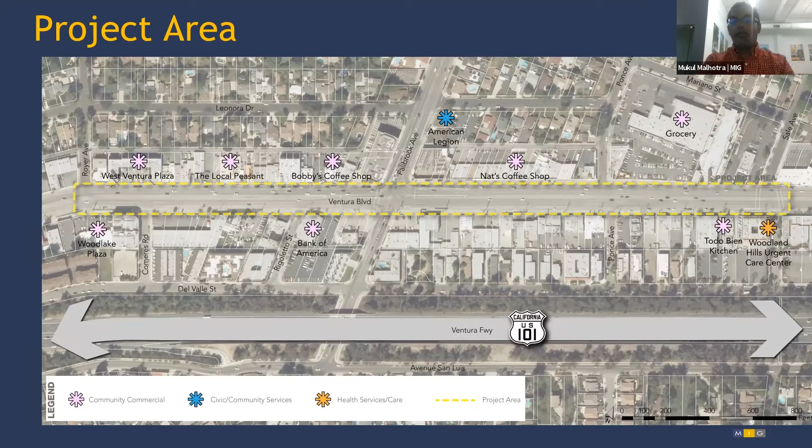Just to step back, it's important to remember that our project area essentially goes from Royer Avenue to Sale. The project goals are to improve overall comfort for all users of the street, people who walk, bike, roll, take transit, or drive. We want to create lively, active walking and bicycle environments, but it's critical that all improvements take into account the businesses, the local mom and pop shops valuable to creating and strengthening the Main Street experience, and then maximize improvements that achieve several co-benefits, like improving the overall tree canopy and other greenery that reduces the urban heat island effect, supports pollinators with improved planting, and improves water quality.

We clearly heard from the community there is a great deal to enhance the overall identity. Again and again, community members shared with us that they want to celebrate this part of Ventura Boulevard to become the Woodland Hills Main Street. This will help guide future grant applications in phase 2 improvements that Michelle talked about. At the end of the day, we want to make sure this is built on a strong foundation of feedback from you, stakeholders, as well as community members.

Lastly, emphasizing that this is phase 2 of the improvements, it definitely complements and builds upon phase 1 improvements, which focus more on signage and striping, improving parking, amenities, and of course improving overall safety for all users of the street. The project goals build upon the phase one improvements, which focus on creating diagonal parking, striping, and increased opportunities for people to cross the street.

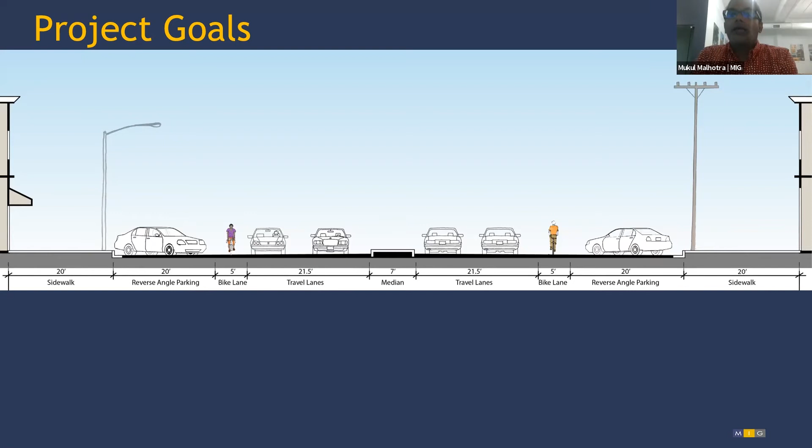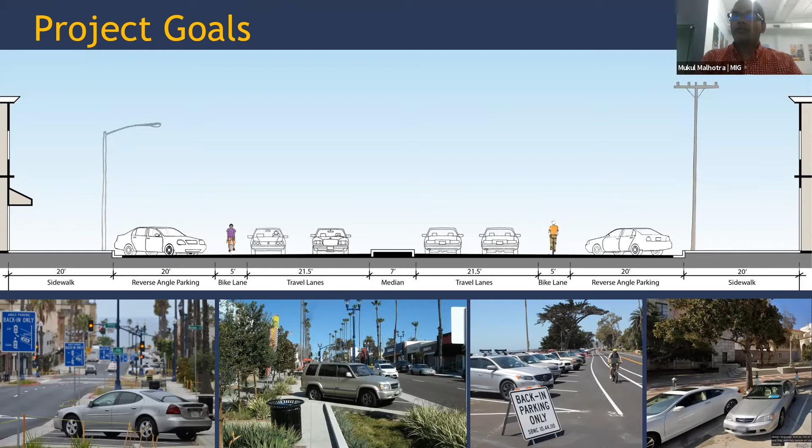This is building on what other cities have done over the last few years. You're seeing examples of Mission Avenue in Oceanside, or Santa Barbara, or closer to home in Pasadena on Garfield and Vista Avenues. This in turn builds on what other cities have done outside the Los Angeles County area, including Congress Avenue in Austin, or closer, San Diego, where Stephen actually lives along this street. So if we need to, we can ask him to share how he experiences a very similar street.

In terms of phase two, which is the primary focus of this meeting, we are really focusing on what's happening along the sidewalks, wherever we get opportunities with bulb-outs within the parking lanes, and of course the median wherever we get these opportunities.

We are definitely building on past and concurrent community efforts, including the 1997 Woodland Hills Streetscape Plan, the more recent Phase 1 engineering plans, and the citywide Vision Zero action plan.

Our project process was in 4 different phases. The first, about 2-3 years, we started with existing conditions analysis. A critical component was a number of stakeholder and focus group meetings that provided us valuable feedback. That was then married into the visioning and alternatives we did in spring of 2019. COVID-19 was a bit of a hiccup, but we continued to look at the different alternatives we'd discussed with the community, and laid out the emerging design layout.

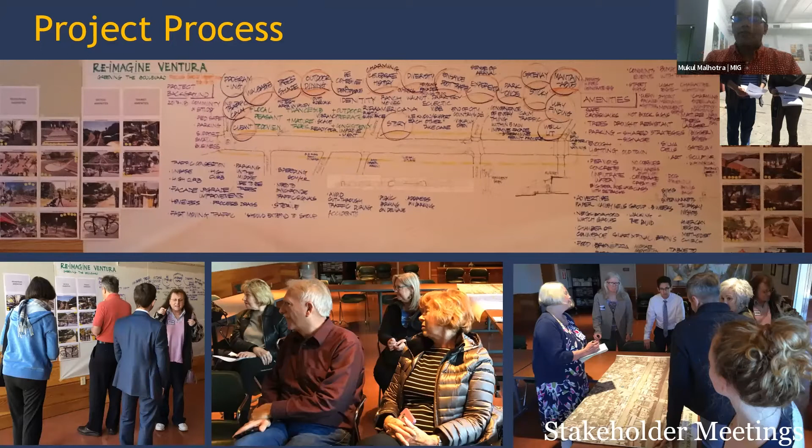I know some of you were there for the initial stakeholder meetings that we did. You can see we recorded all your comments, and that in turn helped us come up with the overall vision for this project.

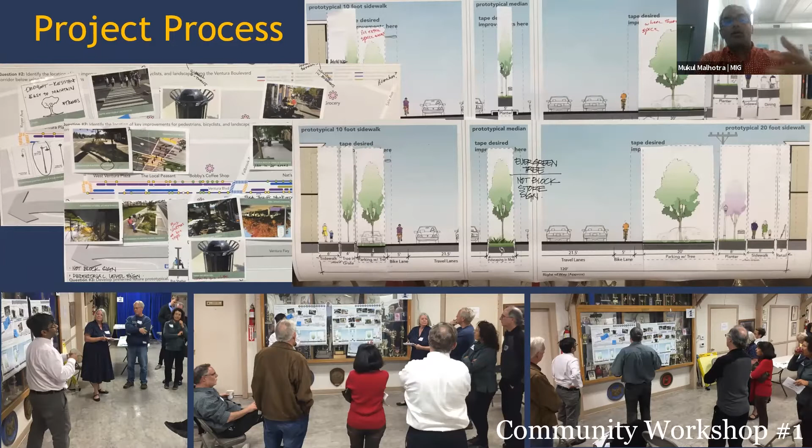At the first community workshop that happened a couple of years ago, we played with different alternatives. We heard how you wanted us to explore different concepts, whether it was a narrower sidewalk or a wider sidewalk along the four blocks between Royer and Ponce.

Building on that, it's important to keep in mind your vision: ensure safety, make it comfortable for all users, enhance walkability and bikeability, and build on economic development. The local businesses are critical to us, ensuring a Main Street experience.

Also celebrate the identity of being the main street of Woodland Hills, and sustainability, integrating it through trees and shade, reducing the concrete impact we have right now. And last but not least, any and all improvements should be maintainable.

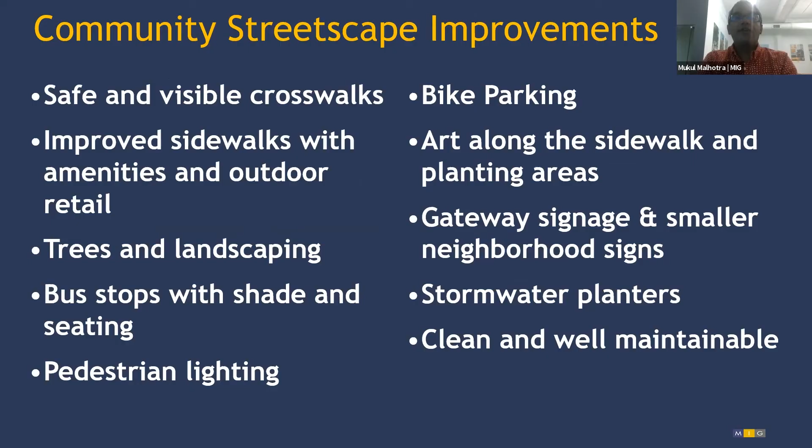With that, you also gave us the top 8, 9, 10 key physical improvements you would like to see all along the corridor. The first, of course, being safe and visible crosswalks.

We get increased opportunities both at Royer with a signalized intersection and high visibility crosswalks, and similarly we see new improved visible crosswalks at Ponce, which would have a pedestrian beacon HAWK signal.

You also told us safety means better pedestrian lighting all along the corridor, as well as making sure the sidewalks have amenities that increase the overall experience of the street, be it signage, trash cans, or some limited seating only at key points, primarily single seating elements.

This encourages more people to pause as they wait for outdoor retail opportunities or wait for people in adjoining businesses. Improved bus stops allow for more opportunities for people to take transit, amenities that encourage walkability, and complement the buffered bike lanes envisioned as part of the phase one project, including bicycle racks.

Having opportunities within the sidewalk would encourage more of our local businesses to use the widest sidewalks for outdoor retail, especially outdoor dining. We have a number of great cafes and restaurants, and we want them to have more opportunities to use the sidewalk and increase the overall Main Street experience.

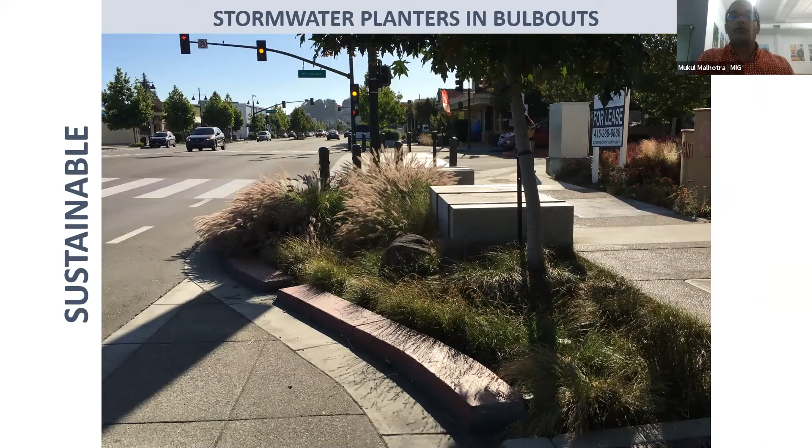Wherever possible, we want stormwater planters and more pervious surfaces to improve water quality. And last but not least, any and all streetscape amenities need to be selected so they are clean and can be well maintained by the city.

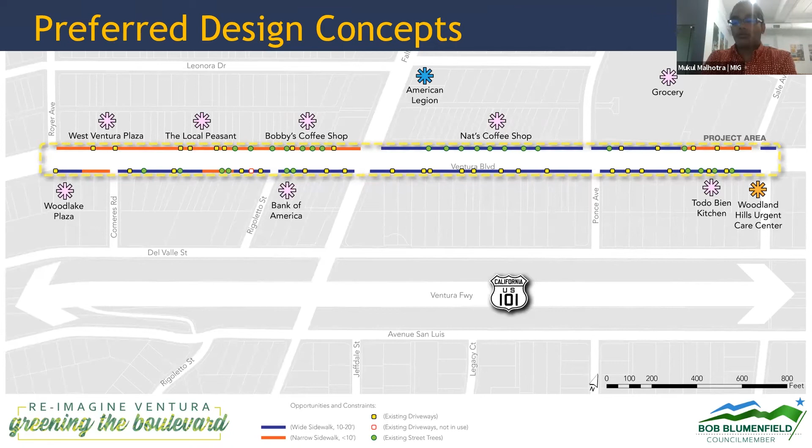With that in mind, we took all this great feedback on different types of physical improvements and began incorporating them along the corridor, keeping in mind two big prototypical experiences. The orange you see on this map is where our sidewalks are about 10 feet, sometimes down to 7 feet. Primarily along our corridor, what you see in blue are wider sidewalks, about 20 feet wide, allowing more opportunities for outdoor retail and dining.

Let's jump into the very first prototypical condition where the sidewalks are wider, about 20 feet wide. This is more an existing prototypical experience. We have some trees, not a lot, but we experience what is clearly a harsh, wide concrete sidewalk and harsh asphalt.

What we clearly heard from the community: let's improve the sidewalks, provide opportunities for dining, provide shade through trees, and incorporate amenities within the sidewalk. Provide a few opportunities here and there for single seating elements, complemented with sidewalk amenities such as bicycle racks, as well as identity improvements like signage or sculptural amenities.

Within the parking lane, continue that experience with drought tolerant, easily maintainable landscape planting, or with shade providing trees.

And what do we experience if we are driving in the middle of the corridor? Clearly, the desire is to make sure we can still see the experience being created along the sidewalk, and ensure traffic continues to move smoothly as proposed in the phase one improvements, but also allow for opportunities wherever possible. We have medians to allow for landscaping to create a sense of arrival, so people even just driving through understand this is a main street of the Woodland Hills neighborhood and it should be respected as such, increasing opportunities for local destination experiences.

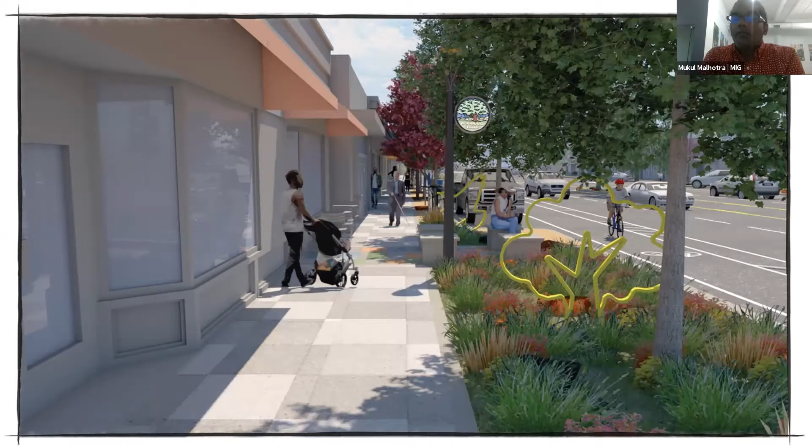With that, let's go to the other kind of experience we have, namely where the sidewalks are a little narrower, about 10 feet wide. Again, what is common in the 20 foot wide sidewalk experience is we have very wide impervious surfaces, be it concrete sidewalks not in good shape, or the roadway, which is a sea of asphalt. The desire is to have similar improvements to where we have wider sidewalks.

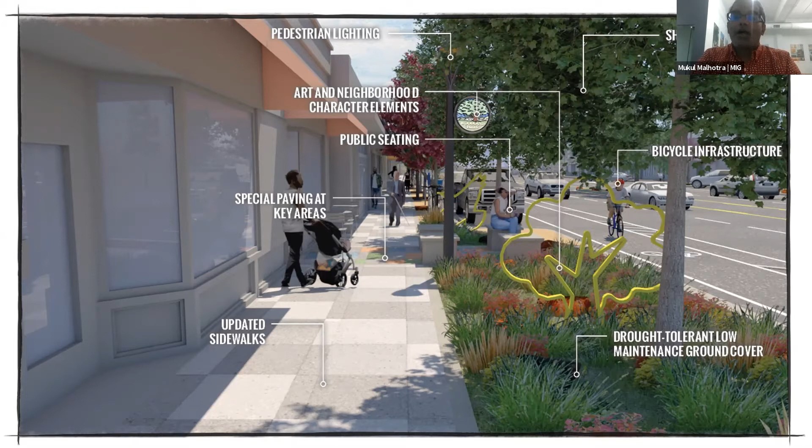Namely updating the concrete sidewalks, allowing for some color in the sidewalk or planting, providing amenities including seating, pedestrian lighting, shade providing trees, drought tolerant landscapes, but also allowing for opportunities for art and signage to celebrate the unique identity of this area.

And as we experience more opportunities to cross the street with high visibility crosswalks, we want to make sure they're complemented with similar landscape improvements and new signals, be it at Royer or a pedestrian hawk traffic control at Ponce.

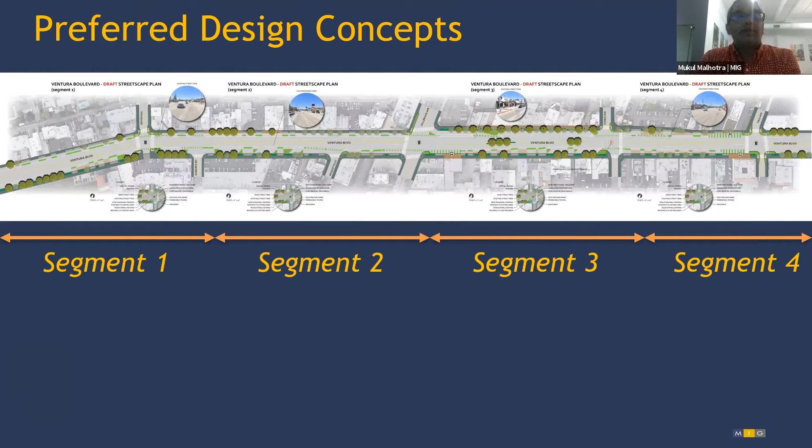Let's finally walk through from west to east and look at the opportunities block by block, starting from the very western edge between Royer and Comeres.

You experience this wide area on a day-to-day basis. The aim is to minimize the impervious surfaces, allow for shade providing trees, continue that experience of softening that area within the roadway, but also focus on emphasizing the opportunity we have at Royer with the signalized intersection and the much needed crosswalk improvements envisioned as part of phase one. All of these will have ADA compliant crosswalks or ramps to allow people of all ages and abilities to safely and comfortably cross the street.

As we go eastward from Comeres to Fallbrook, we continue the same palette of improvements, be it shade providing trees, diagonal parking, pedestrian lighting, improved crosswalks across Rigoletto or along Ventura Boulevard, and opportunities to improve with high visibility crosswalks at Fallbrook.

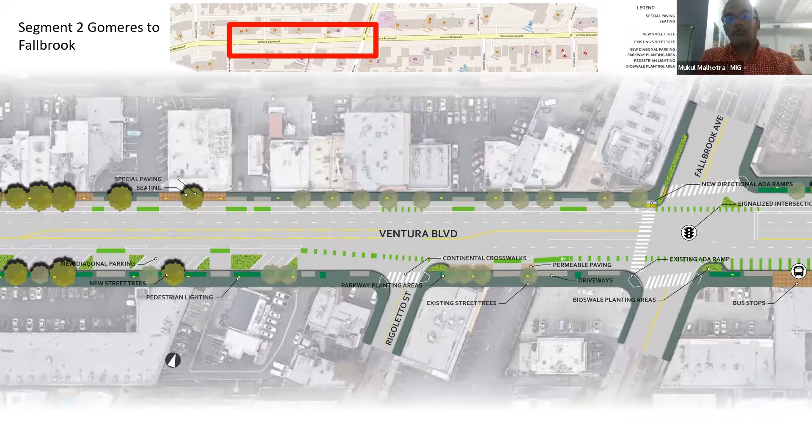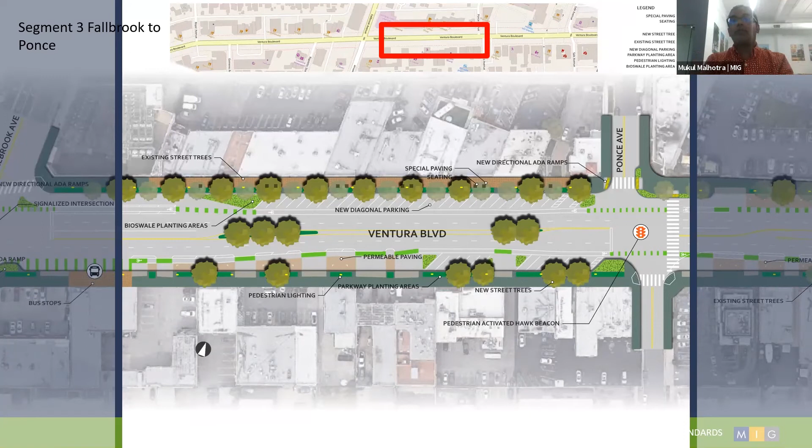The next block, between Fallbrook and Ponce, the opportunity is to continue the same palette of improvements, have special paving with reconstructed sidewalks, incorporate pedestrian lighting and shade providing trees, incorporate improved and new crosswalks at Ponce with the pedestrian activated hawk beacon signal, and allow for opportunities for signage as well as wayfinding to celebrate the overall main street experience, but also individual businesses.

And then the last block, as we go towards Sale, incorporates the same set of pedestrian improvements, including trees, pedestrian lighting, improved bus stops at Sale Avenue, as well as opportunities to celebrate the Main Street experience.

The aim is to incorporate a wide variety of tree types, making sure we allow for color as well as shade. We clearly heard this, and this is where we have carefully selected the planting palette to ensure that, be it new trees or trees as they become mature, there is very clear visibility to the individual businesses all along the corridor.

Complementing the trees would be the understory planting, which will be low water usage, easily maintainable, but also provide some color all along the corridor.

In summary, for phase one improvements that Michelle talked about, there's going to be a net gain of about 20 spaces. We are going to get a contiguous 1.2-mile long bicycle facility, and of course 7 new or improved crosswalks.

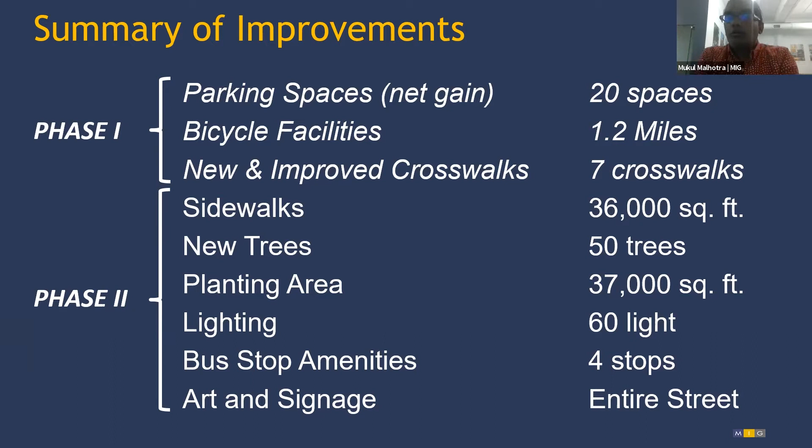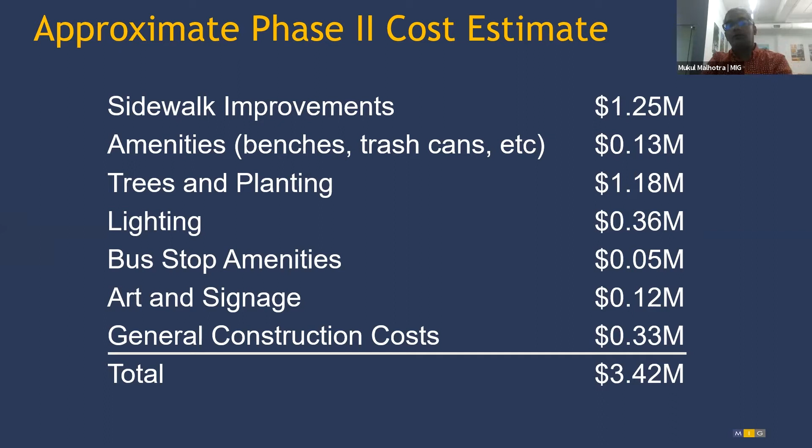What will it cost us? Essentially, overall, it costs about $3.4 million, with the primary focus being on sidewalk improvements, but also providing opportunities for trees and planting and pedestrian lighting, and last but not least, art and signage.

With that, we'd like to jump into our discussion. Holly, if you can help us add the 2 new questions we want to hear back from you: what you like about these proposed improvements, how would you like to refine them, and what are your preferred high priority improvements, be it improved sidewalks, amenities like seating areas, trash cans, pedestrian lighting, trees, planting, improved bus stops, art and signage.

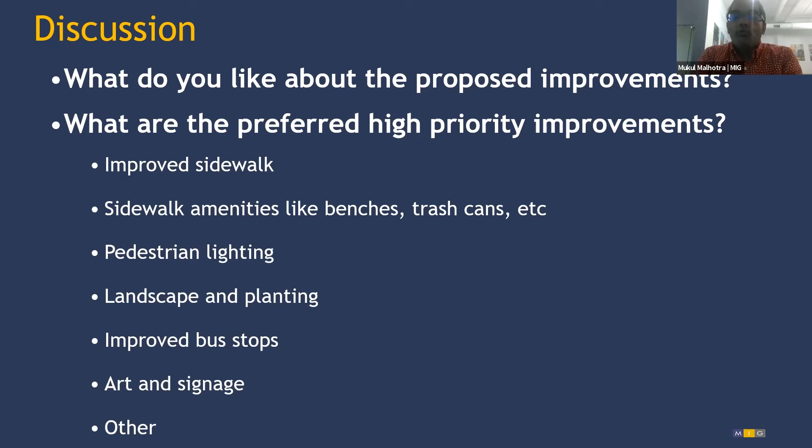We are going to record all of this, like we did a couple of days ago on Tuesday evening, with all your thoughts and feedback in what we are calling a mural board. Please provide us your feedback as I switch to our mural board and begin to record your comments. Stephen has already started to record these comments as he was looking at the feedback.

Holly, do you want to summarize some of the initial feedback we got while I was presenting? And then we're going to request people to raise their hands so we can have them share their feedback in real time.

Sure, Mukul, thank you. The one comment we got from the chat is really, what is the deal with the backwards parking spaces? I know this is an unfamiliar treatment, but it does increase safety. Maybe, Mukul, you want to take the first pass at explaining some of the benefits, even though that's not something people are used to?

Sorry, can you see the mural board now? I just want to confirm that you can. Yes. Okay, sorry, Holly, I apologize. Do you mind repeating the question?

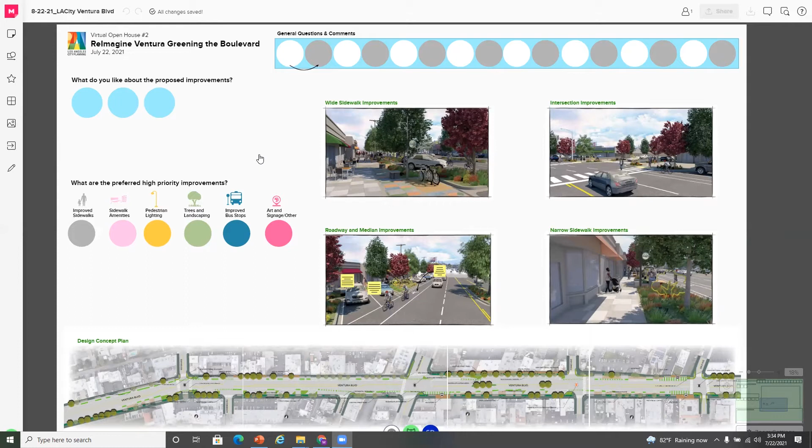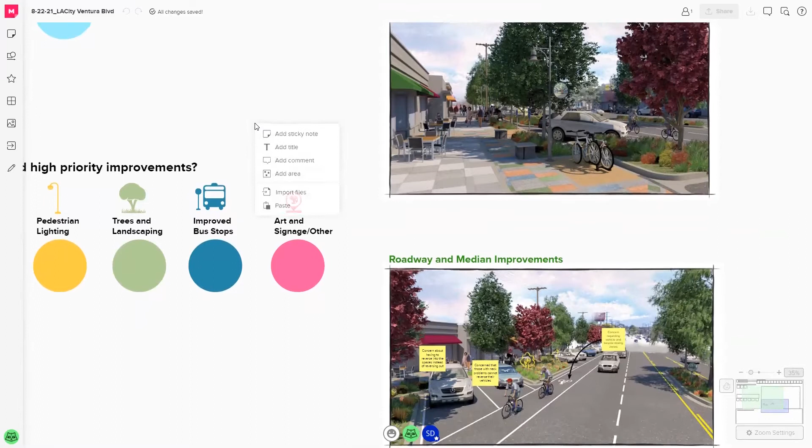No problem. Throughout this process, from the 2016, 2017 meetings about phase one onward, there have really been a number of questions and concerns about the back-in diagonal parking. I know this is a really unfamiliar strategy. It came from some of the community members who led off and were proponents of getting the council member to initiate this project back in 2016. We're really looking at ways to increase the number of parking spaces, but they do have a number of safety features.

Even though it's not the usual way, you want to take the first pass of explaining some of why we do this, how it integrates with the bikes, and how possibly people can navigate this.

So very briefly, the way the phase 1 improvements with the back-in parking was envisioned is what it clearly does: it improves safety in a number of different ways. Number one, it improves the visibility for both the person parking their car and when the parked car is trying to come out and move into the moving lane. It improves the visibility significantly.

Similarly, it also improves safety for bicyclists, and where this really helps is it allows both the driver and the bicyclist to have more opportunities to make eye contact. I know our cars now have sensors to help if we're close to an object, but nothing improves safety more than direct eye contact. This back-in or reverse angle parking increases opportunities to do so, so that is automatic safety for both bicyclists and drivers.

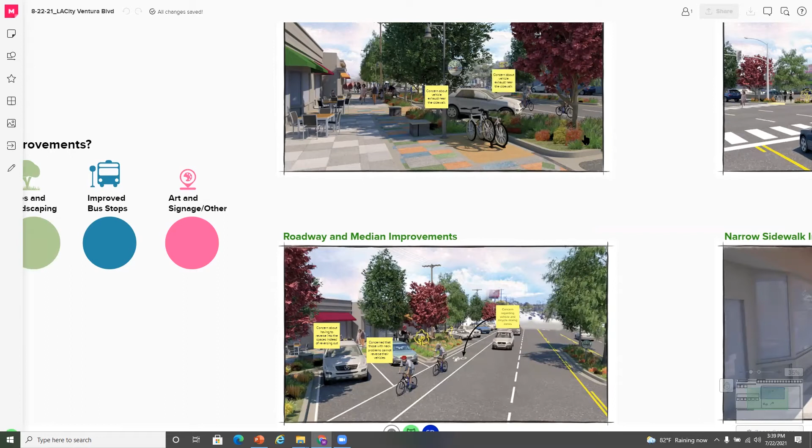There are concerns being expressed about the reduction in traffic lanes, what will happen to all the traffic, maintenance of the spaces, how they will clean them. Also concerns about the landscaping impacting visibility. I'll try to answer just a few of those.

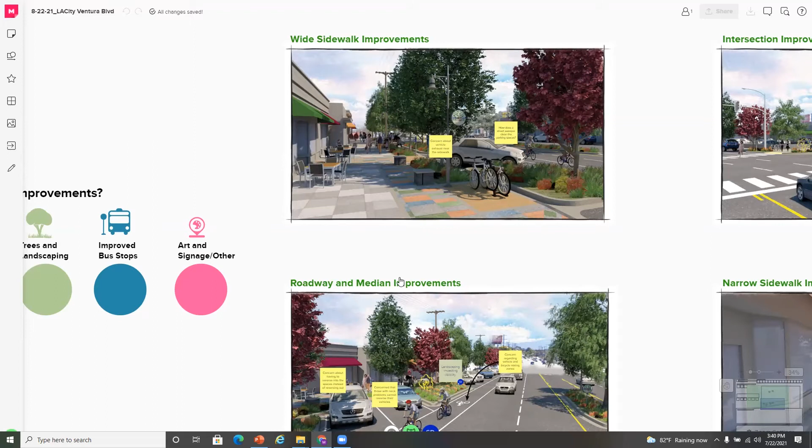There were significant traffic studies conducted as part of phase 1. This was a balance between taking this area, which now seems more like a freeway, more like an alternative to the 101 which it often serves as when the 101 backs up, and giving this more of a neighborhood feel without impacting the flow of traffic. Those traffic studies did indicate this would not significantly impact the flow of traffic.

But what it will do, I think everybody who drives the stretch knows, is that if it's posted for 35 miles an hour but it's not literally a peak period where traffic is backed up, people drive much, much faster, 50, 60 miles an hour. That doesn't help anybody, either for safety or for the businesses to have any sense that people even know they're there or what they might have on offer.

I don't want to go into too much traffic engineering 101, but there are a lot of counterintuitive things where we think driving faster makes the cars flow faster, but really 35 miles an hour is this kind of sweet spot where you can push the maximum number of cars through a given space, because you don't have as much racing up to an intersection just to stop, then queuing, then going.

We have definitely spent the last year coordinating with all of the departments. We had a question about street sweeping and maintenance. With LA Sanitation, we now have smaller equipment, it's not just one size fits all.

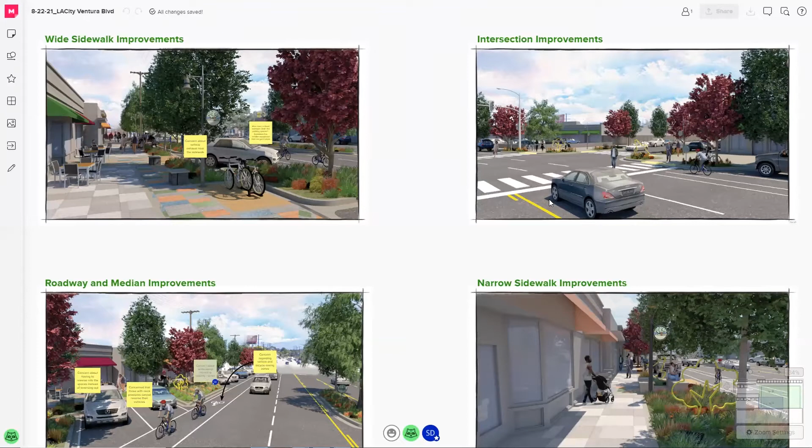All of the landscaping, this is something our Streets LA department, engineering, and DOT keep maintained. We still maintain all of the setbacks from driveways for new trees, and all the landscaping, even without any trimming or maintenance, is selected so it will never get above 24 to 36 inches high. And then we got some other questions about exhaust going into the sidewalk, not good.

But again, that's why, if I may just add, Holly, that planting strip, which is low maintenance and drought tolerant, would help with the buffer.

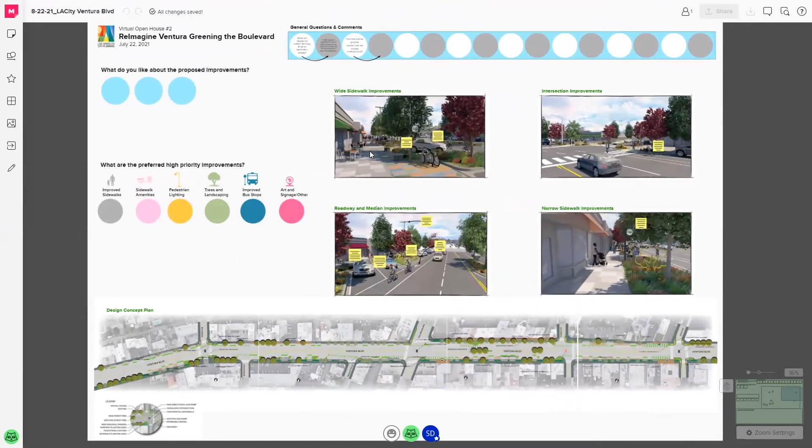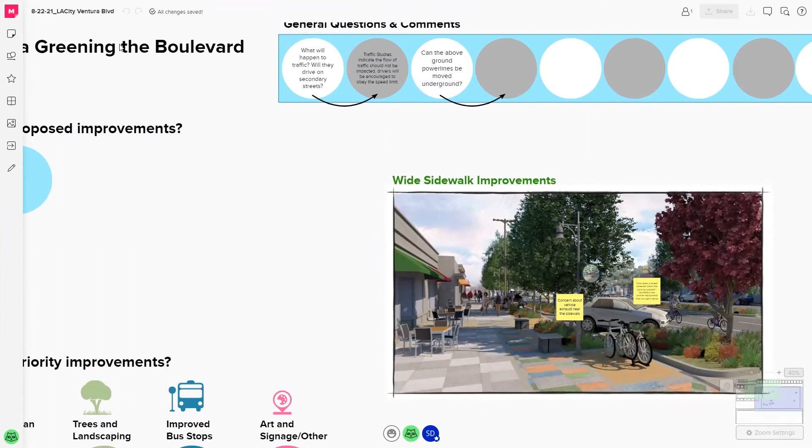So there's that, I don't know. It has come up, like I said, as a priority, but it's sort of a choice. Would you rather have undergrounding the power lines and then no other improvements other than what's being done in phase 1? Or would you rather have this?

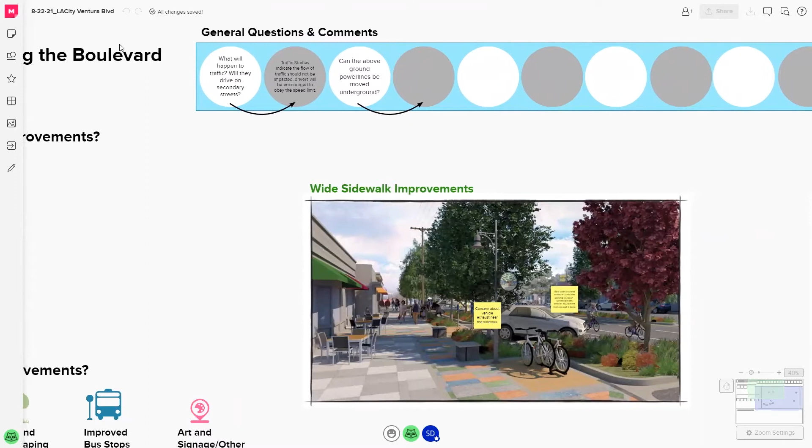It's kind of, there's not—while there is a variety of state funding programs such as urban greening, and county level such as Metro's active transit—there's a lot of funding sources out there for this type of greening and just livability and comfort. I think we've seen what's going on with the heat and the wildfires and everything else. We have to start preparing for the next 50 years. There's not any funding for undergrounding power lines other than what we pay in our bills. So that's the reality of where we are on power lines.

I hope that answers your question. I'm happy that you do like some of the other improvements.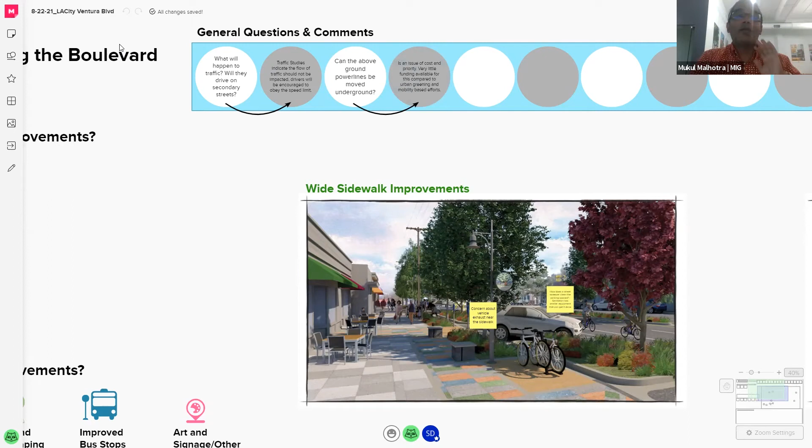So, okay, but I do see the presentation as well, and as I'm sure you all know, I'm a proponent of this project and everything that you're proposing, and I'm in support 150%. I just have a couple of issues that I've noticed on the plans, and I want to show them to you or present them to you.

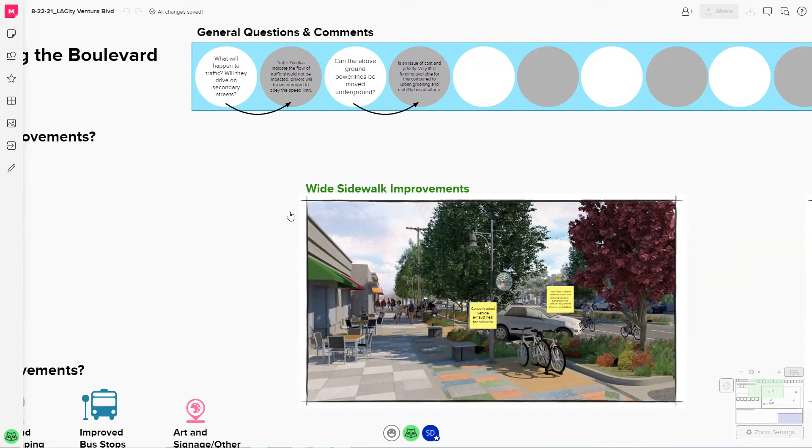One is that it looks like the planted medians are only occurring in a couple spots, and those are pretty important if you see your images, your renderings. Trying to increase the amount of planted medians would be very helpful.

I know there's an issue with the fire department, but if you can take a look just west of Rigoletto and 2 or 3 locations west of Sale, it looks like you could actually get some more medians in, and you should take another look at that if you can.

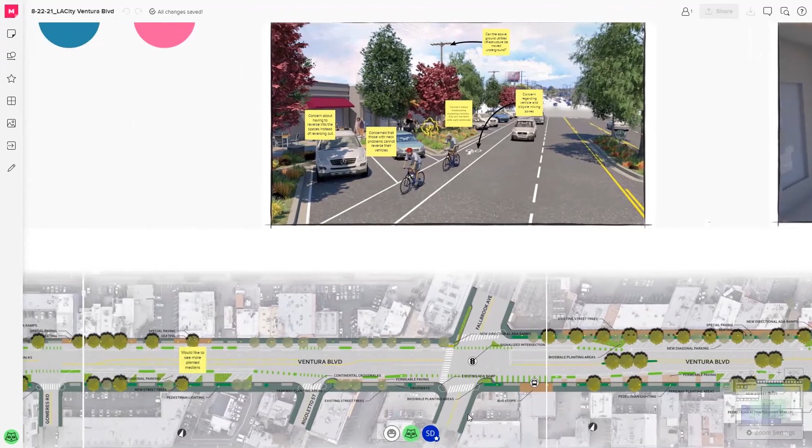Okay, and then the other thing is between Royer and Fallbrook, about 1,100 to 1,150 feet of length. It sure looks like it's going to need another crosswalk in the middle of that block, maybe at Gomer's or at Rigoletto. I'm concerned that you have diagonal parking opposite a business like the Local Peasant, and we haven't really solved that issue of people jaywalking and cars going fast.

So those are the two things I've seen, and I just wanted to fine tune things, but again, I want to stress how much I support the project and all the effort that's gone into it.

I appreciate it. Thank you, Dennis. Those are both good points about exploring more opportunities for medians in the middle wherever possible. Stephen is just putting those marks with the new crosswalk, if possible, and we will share that with the phase 1 designers too.

Reeyan, did you want to share your feedback? Yes, and I just want to say it's great to see a lot of familiar faces on the call, and I especially want to give a shout out to Dennis, Kathy, and then Jeff and Elizabeth from CD3, because these folks have spent a lot of time and dedication over the years working on this.

I have to echo what Dennis said. In a lot of ways, as far as activating the public right of way over there, and especially providing more mobility and uses, a crosswalk of some type, whether with a dedicated signal, signage, or a pedestrian refuge area, would definitely improve the mobility in that area.

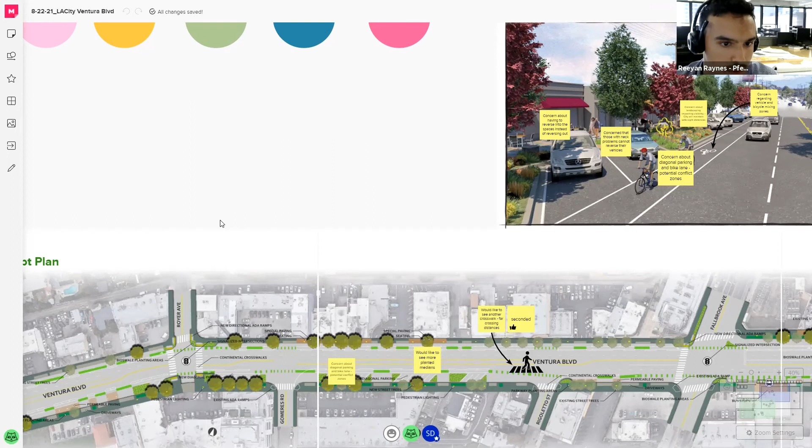And then secondly, if you go back to your renderings a little further up in the presentation, I have to compliment how well these came out. I think this one here, the wide sidewalk improvement, is a good example of the types of usage you can see. But more importantly, as we know, different uses of non-fixed furniture in the public right of way typically become a problem with retail security.

So if there are more ways to include civil infrastructural improvements with street furniture, I see you have some benches, but I'd push the design team to look at something a little more friendly or character defining in the area. Some of the ground treatments are quite incredible, and some of the public art installations and bulb-outs are really creative for this neighborhood. Look at some of those funky, unique infrastructural objects that can give this more of a placemaking, character-defining feel that we'll see in other parts of the city.

But with that, I'll save my time. I just want to say thank you to everybody, thank the design team. These are quite incredible, and I'm super eager and excited, like a lot of us, to see this happen. So thank you guys.

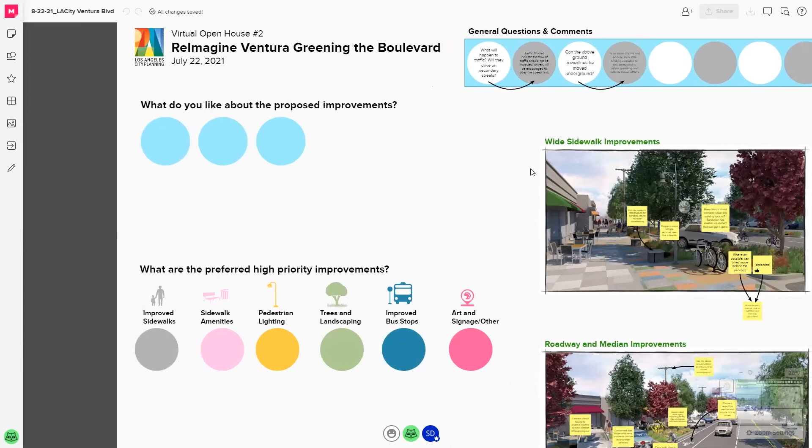There's many reasons for that. Once people have parked their vehicle or they're on the sidewalk, they've kind of checked out of being part of traffic. Very frequently we'll just step off the sidewalk into the lane or step out of a car, or someone with a walker, especially someone - it's a big issue with the vision impaired folks, because you're channelized, right? There's literally no room to avoid a collision. I don't go very fast, but I've had some close calls, and some people move pretty quick on their bikes.

I know that Jeff answered that - with the number of driveways, intersections without signals, so much of the parking would have to be taken out to make that possible, even from a visibility standpoint.

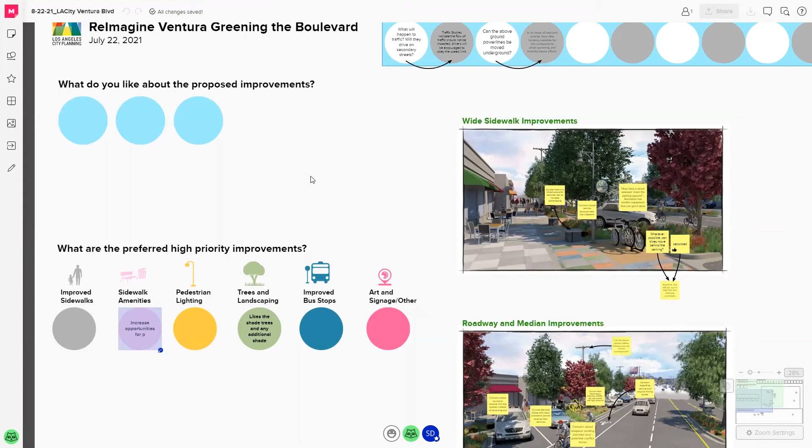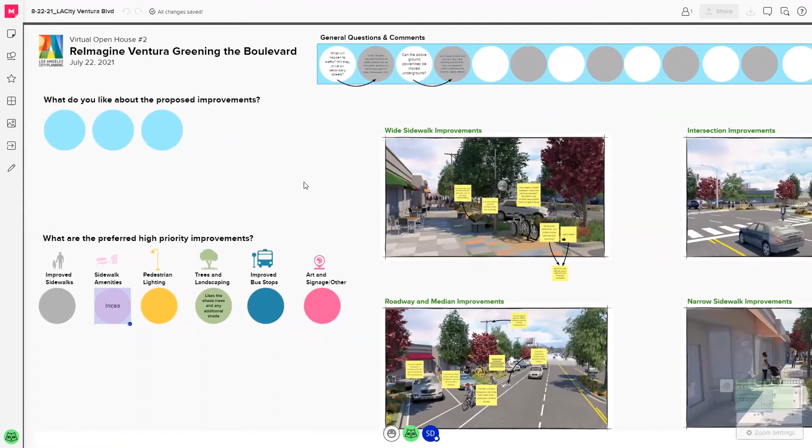I was going to say one other thing here. Oh, I know what it was, and thanks, Reeyan. The mid-block crossing, I mean, great, right? We all love those. It comes up again and again that people park across the street and then dash across to places like the Local Peasant spot, and then sometimes when they're coming back, they're maybe a little tipsy or impaired. So it really is a dangerous situation.

But it goes back to the same thing about the sheer number of driveways on the south side of this stretch - they're such a challenge, right? They're a challenge for the median, they're a challenge for any kind of mid-block crossing, because you still have to have turning space and visibility coming from both directions in and out of those driveways. It's not like we've ignored it.

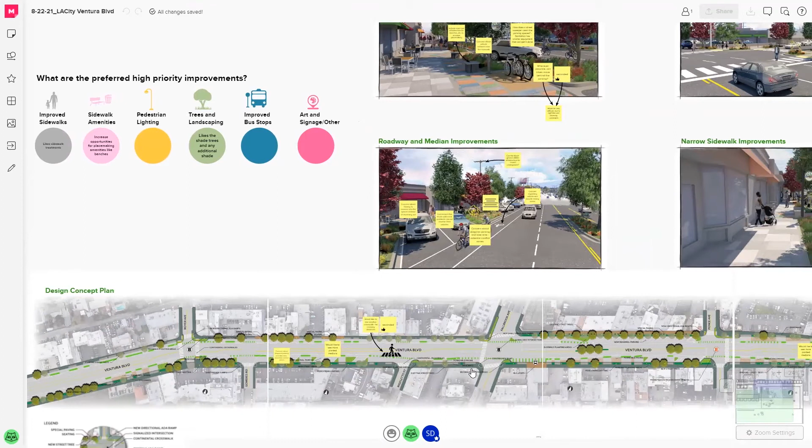And honestly, we haven't quite - we're still fighting the good fight about seeing where we could add more median space. But right now we're responding to what is being striped and proposed as part of phase one, and so these are in essence the pieces of the median that have been left to us. We've tried to get planting in them wherever possible. I hope that answers your question.

Areas for people to return e-scooters to. Wow, e-scooters are another one of these things that came out of sort of out of space to our city just a few years ago, and that still has not been, I would say, adequately resolved. Some cities like Santa Monica paint areas where people should return them.

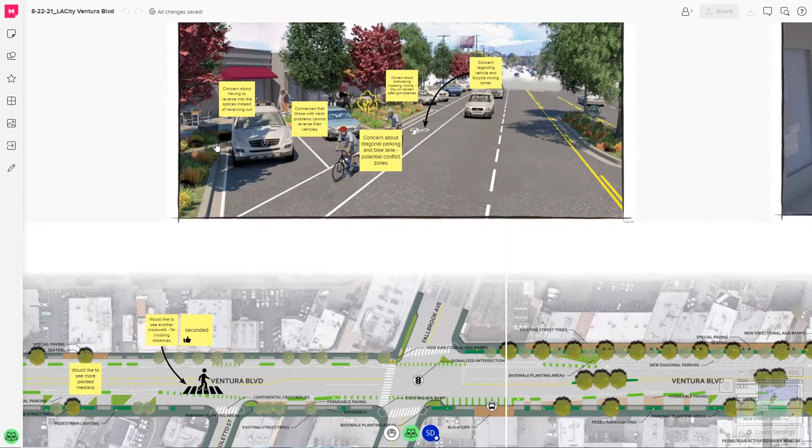And there's varying levels of success. I think people do just tend to leave the scooter wherever they want to leave it. Luckily we're not short of space, especially in the wider sidewalks here.

If I could just add on the scooters - under California state law, it's technically illegal to ride them on the sidewalk, and also technically illegal to ride them on a street with a speed limit of 35 miles an hour. So you do have a bike lane on a segment here where you could ride them, but it just didn't feel like this was a location where we either could or needed to really worry about scooters. Hopefully maybe we'll get to a point where we will need to add that amenity, right?

But it didn't feel like something that we needed to address at this point. Yeah, you're right, Jeff. Doesn't seem like the demand is quite there yet.

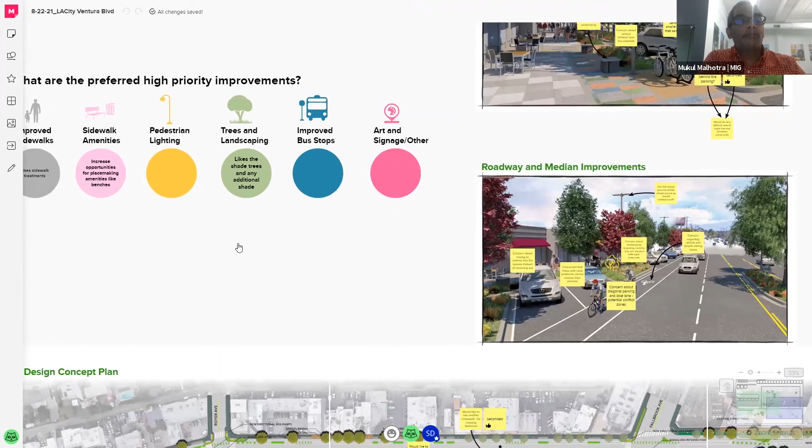So we still have Janice, and I think Janice and Dennis still have their hands up. Janice, do you have additional feedback you'd like to share? And I want to encourage other community members, some of whom just joined us 5-10 minutes ago, to please share their feedback. We're looking for your input to answer two big questions: first, what do you like about the improvements or refinements, and second, which improvements would you like to prioritize? So Janice, please go ahead.

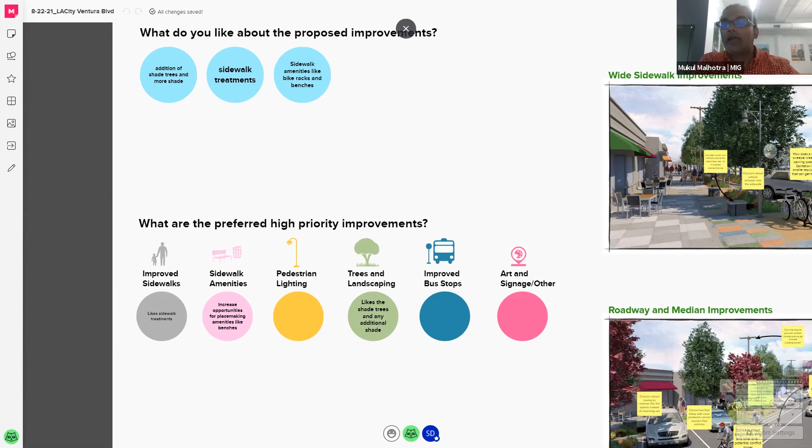Great, and before I call on you, Dennis, to share your feedback, just a couple of questions from other community members. Yes, Ryan requested increased opportunities for wayfinding and signage — I think that's a great comment, we'd definitely like to do that. And then Mark had a question about whether there was an intent to increase required dedications. Holly, you can add to that — whether we're trying to acquire additional right of way or not.

Sure, Mark, the intent here is we're just using the available public right of way now. The only thing we're really expanding is where you see the planting areas out in the parking lane, at the end of a rank of diagonal parking, where you have these odd-shaped leftover spots. The one thing that really impacts the future of this project is the ADA compliance issue. If people are familiar with this stretch, a lot of water moves down the street, so the curb heights are very high, especially at driveways, and the cross slope for somebody using a walker, pushing a stroller, or a shopping cart is not only non-compliant but a real challenge. When you bring up right of way, that's a good point, because it's not only the cost of rebuilding compliant sidewalks, but almost every one of those driveways we'd have to acquire private property from the owners — whether a small shopping center, a large one, or a hotel — to really correct this. So I hope that answers your question about right-of-way acquisition.

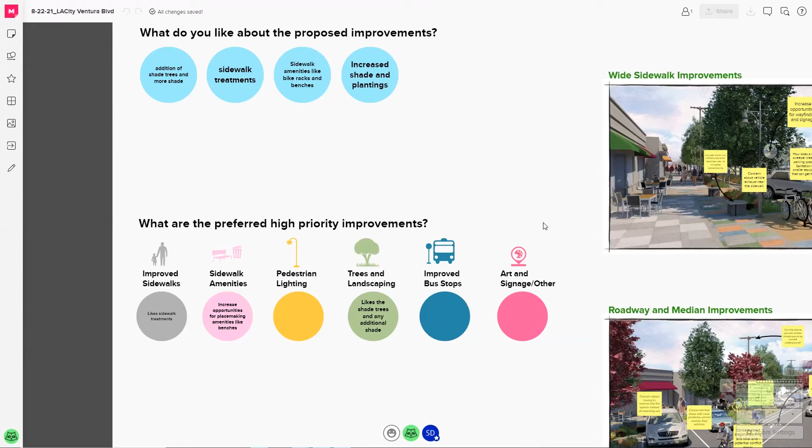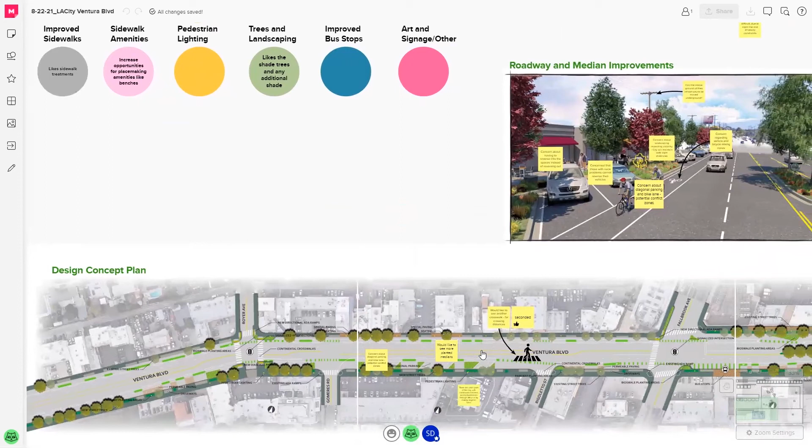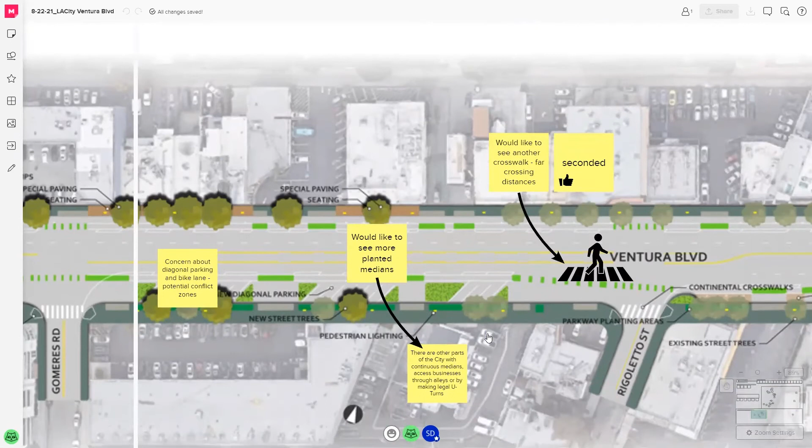But I will mention that in other parts of the city there are continuous medians, and the driveways don't necessarily dictate not having medians all the time. In other words, you can go to an intersection and make a legal U-turn. Also, Ventura Boulevard is lucky in that it has alleys, so you can go down to the next intersection and access parking through alleys — in fact, a lot of businesses rely on that because they don't have a driveway. So really, it's a big compromise to give up planted medians. I'm not saying to overdo it, but just a 10-foot-long median with a tree in it, in a few more places, would be very helpful for the feel of the area. Thanks so much, Dennis. I had a really long discussion with Scott a week or two ago about the same issue.

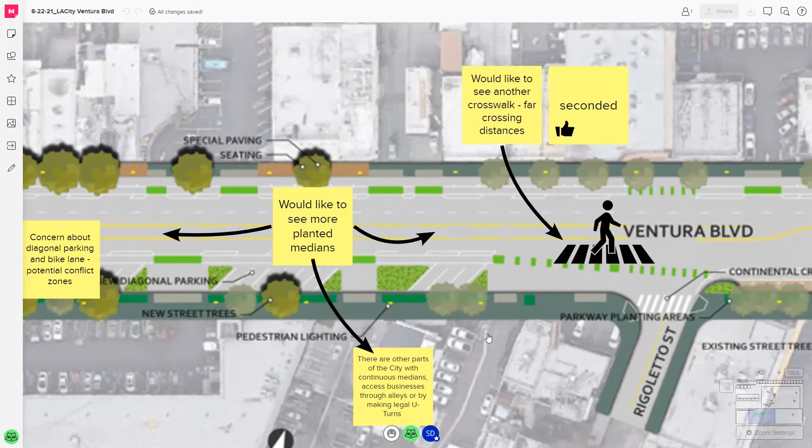Scott Silverstein was another one of the proponents of this, and we're still fighting the good fight to add median space. But part of the reason it got so reduced is we weren't even able to put out the plastic bollards or the hard rubber curb stop, wheel stop elements. LA Fire Department wanted not the 20 feet clear, which has always been the standard and remains the state fire code standard, but started to say they want 28 feet in both directions clear, and they wouldn't even accept the plastic bollards, which are completely collapsible. That's why they're out there. These rubber elements, anything that was mountable, was just a hard no. We really need to, as a city, dig into that deeper.

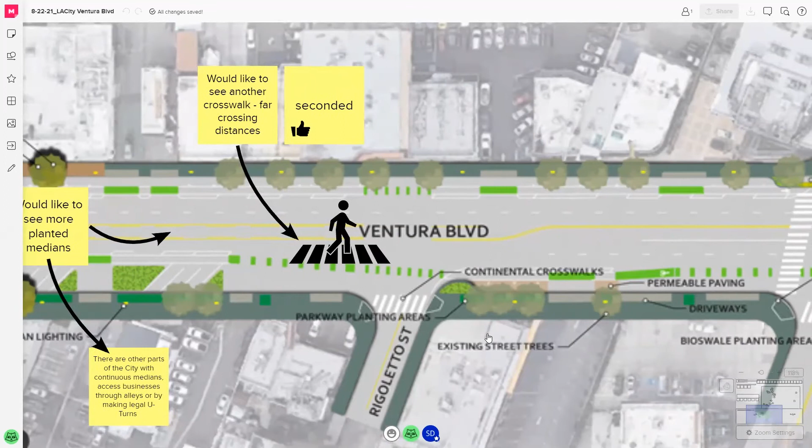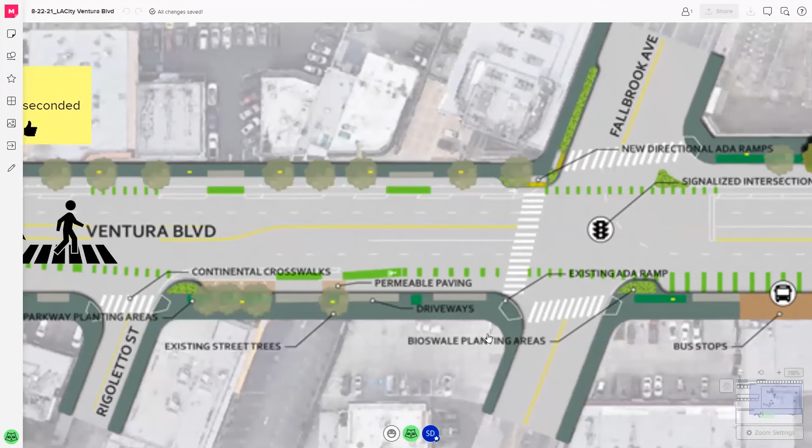This is just a concept plan, following on phase 1, so we're assuming our existing condition is phase 1. But once funding is approved and secured, we would revisit this. It's become a citywide issue, kind of quiet, hasn't gotten a lot of press other than in Curbed or Streetsblog or something like that. There was a project on Melrose Avenue that was completely nixed, something like a complete street with all the curb extensions, and it was abandoned entirely after an extensive process because fire said they don't want to accept any encroachment in our main boulevards and avenues. So it's something we have to address citywide.

Normally if it's DWP or fire, what they say goes. So I don't want to criticize my colleagues in BOE and DOT for just saying okay.

I think to add on to what Holly was saying, which is a really good summary of an issue we run into whenever we try to encourage medians—it's also from the perspective of business owners along the street. We've heard that medians make it a little bit harder to make a left turn or circle into the business, so we want to be mindful of that comment as well.

But we hear you 100%. We can definitely circle back with fire and LADOT once we summarize all of the comments we've gotten in this meeting. And we got another good comment and question from, I hope I'm pronouncing the name correctly, Yusult.

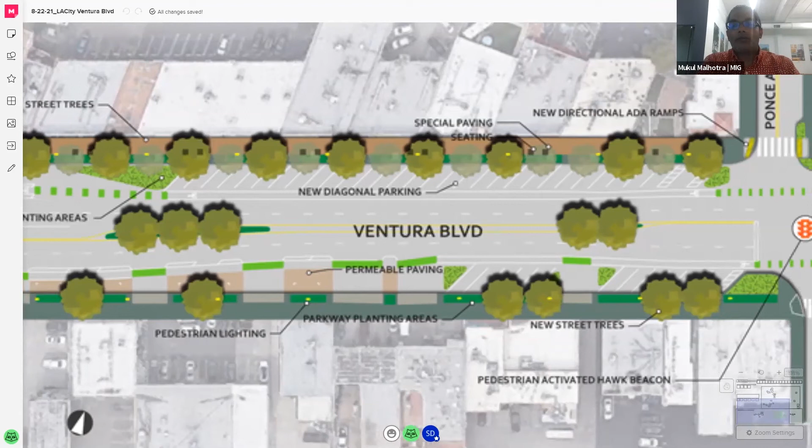We have taken that into account. Holly, you can add more in terms of what's being envisioned with regards to stormwater planters and improving water quality. Maybe I'll show some examples on the map where we're trying to achieve that. Holly, do you want to talk about that? Sure—I always think it's great when you see those high curbs. That's an indication they're designed that way because there's expected very large volumes of water. So we are looking for all the opportunities where we can direct runoff water directly into the planters.

It's a little more difficult—you'd have to reconstruct, I'd say reconstruct. It's difficult in medians per se, because our streets are crowned in the middle, they're higher in the middle. We're looking at ways to infiltrate water wherever and whenever possible, definitely. It may end up being more—if you don't know what a dry well is, there's nothing sexy about a dry well. It's completely invisible, but that might be a solution. It's the go-to in a lot of our city right-of-way improvements. We're at a bit of a greater challenge out here.

To get into water policy in California—DWP doesn't have the rights to draw from the groundwater this far west, so they are a very willing partner to come in and pay for these dry wells that take the surface water and infiltrate it into the ground, which would then be accessible to all the plantings. We'll have to irrigate them until they're established, but most of these things should take care of themselves after 3 to 5 years of establishment.

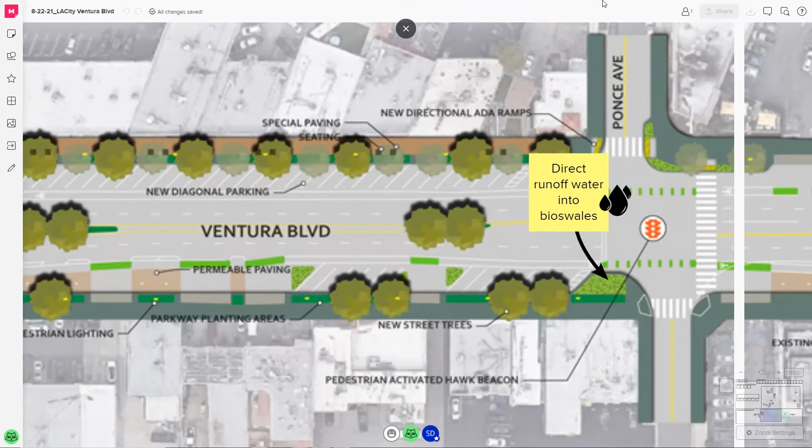As Holly was talking about, you can literally begin to see that essentially all of our project area is either concrete or asphalt. But if you just take your eye to what is being colored in different shades of green, whether it's planted or just simple pervious paving, you can see the transformation of turning this 99% impervious surface into something much softer that lets in and soaks water, thereby improving the water quality.

And as Janice mentioned, we have to take into account all our weather changes and climate change. So it is responding to the larger community concerns that we have heard at a number of different community forums.

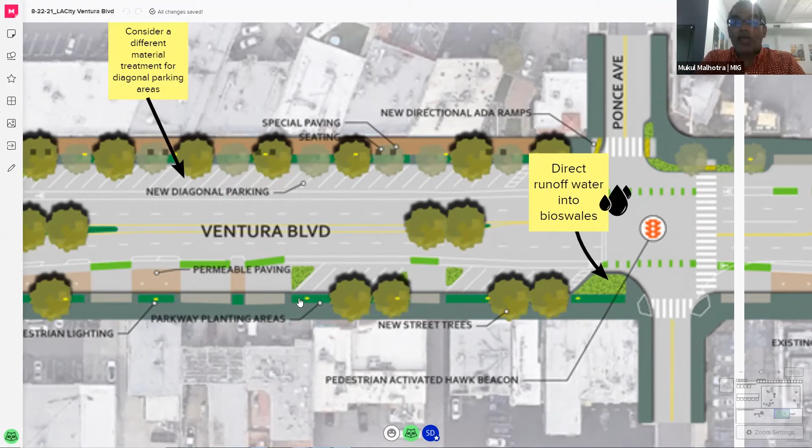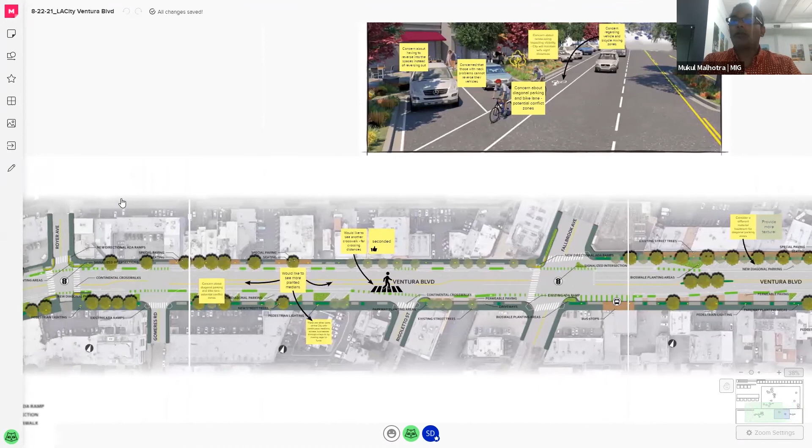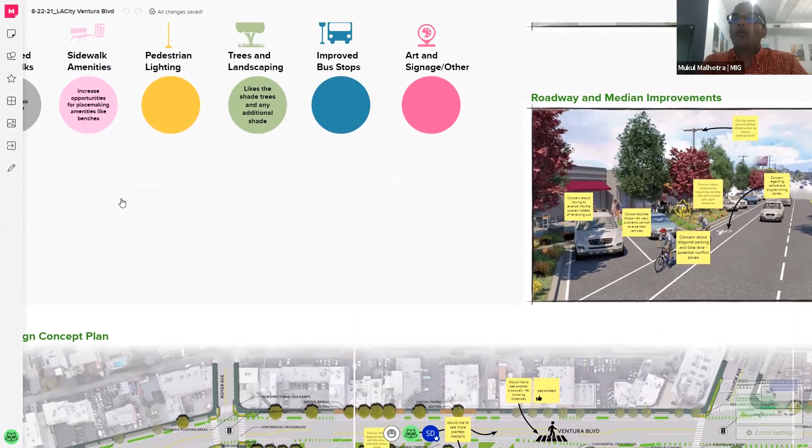We like to keep this conversation going. We'd love to hear from people who have not shared their feedback, especially as it relates to the kind of improvements they like or would like to see a little more refined. We heard great comments about increased wayfinding, signage, and a little more funky placemaking elements that help improve the overall identity and what makes a place memorable. So thoughts and comments from community members who have not shared their feedback, we would love to hear that.

Thanks, Mukul, for reminding us that just taking out some of the concrete goes a long way toward helping with the stormwater situation. And as much as I worked in the urban forestry realm for 15 or more years, I can't forget trees themselves, right? More trees are a really great way to intercept and slow the velocity of water, soaking it in over time versus it just racing down the street to the nearest storm drain.

We did have questions about whether there could be different materiality for the diagonal parking, to add more texture and color. Some of the comments from the survey responses on our project website, bit.ly/ReimagineVentura, also brought up things like wanting to see brick or other materials instead of concrete.

The flip side of that is we've really tried to keep everything as much as possible in terms of materials as the standard materials used by the city, because when things are patched and repaired, they don't have something different in there. You know, what do they have? If you go to any city maintenance yard, they have concrete, asphalt, and some DG, decomposed granite, and that's about the range we have for an enormous area to take care of and keep in reasonable repair.

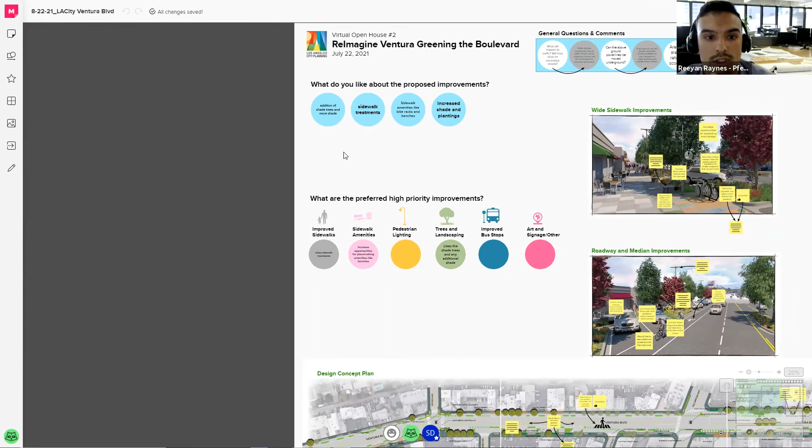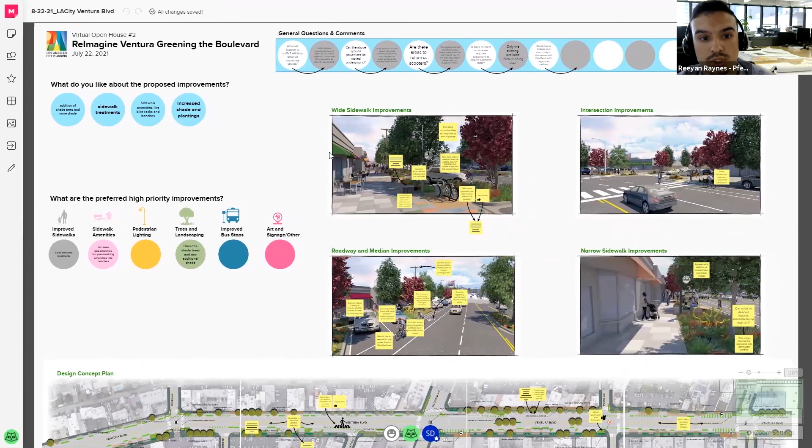Please share your thoughts. To the point Holly brought up from DCP, I think aligning to what the council member's goal was for cool streets and the initiatives he's pushed in Canoga Park - I'll let Jeff and Elizabeth speak more to that. But recognizing the needs of DOT and BSS with their limited material applications, and the labor and skill issue with changing out materials, I think possible treatments like concrete, or texturing it in some way, is within the scope of the city. So regarding the parking area itself, I think that's the most appropriate scope, recognizing what the city needs. And with concrete, you can treat it in different ways to have higher solar reflectivity and things like that. I'll throw it back to you guys.

That's a great idea. With regards to the bus stops, we usually make sure the boarding and unboarding areas - literally where the bus stops are - are made up of concrete. So that's something we can definitely share with the phase one designers.

I'm going to have a hard time - I think Heidi Manning, I hope I pronounced your name correctly, you're sharing your concern about graffiti on the decorative sidewalk designs. Would there be a protective coating used?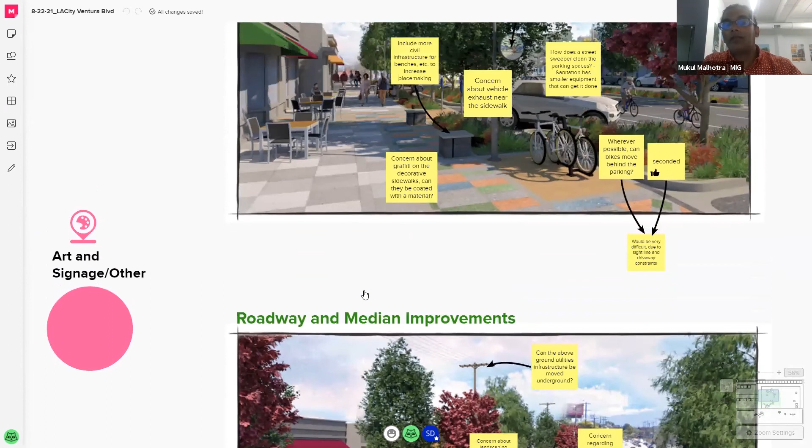You bring up a very good point, Heidi, something we've continuously experienced and learned from past lessons. As you see this rendering, what we did is come up with a concept where the sidewalk would have different colors in them. Even if it's standard concrete sidewalk, we'd first put a pattern of 2x2 score lines, but within them we'd also allow for a diversity of colors within the standard concrete you see here. What's worked well for us is that if graffiti happens, or oil damage, or repairs need to be done, it doesn't become patchy - that's not a technical English word, but I'm using it.

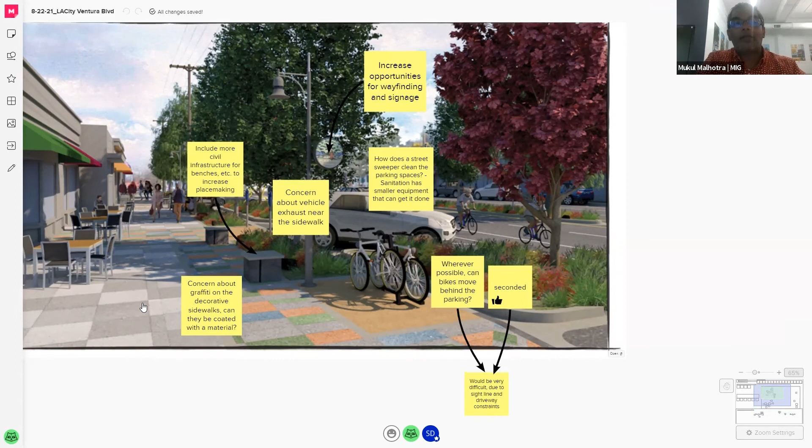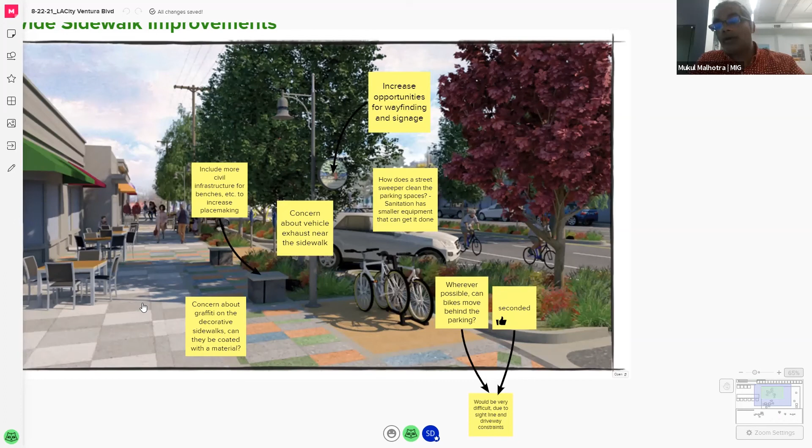The intent here is, it's been our experience - you put in a new sidewalk and AT&T comes and crosses it and destroys it. With this kind of pattern, it would seem more intentional and allow for the sidewalk to be repaired if damaged, either by graffiti or other damage, like a utility coming and making that change. The aim is not to have a kind of coating, because once these get power washed, the coating usually comes out. We really go for a treatment that, when cleaned, is easily cleanable and washable, and doesn't get damaged when it gets cleaned.

I don't know, Holly, if you want to add to Janice's question or answer Heidi's question. I clean - I report a lot of graffiti to 311, and they can either spray paint over it or sandblast it, and neither of those options I'd want to see happen on the sidewalk here. I wouldn't want it to get ruined. That was just my concern. Okay, fair. Good. Thank you, Heidi.

I hate those gray painted squares almost as much as anything they're covering up. But as Mukul said, this is the reality of constant change to our public sidewalks. What I didn't know is it's not only constant, but accelerating, because we're having more and different kinds of utilities - fiber optic, high speed, cell antennas, you name it. It's like this patch and repair thing. We wanted something that would camouflage that, because it will happen. It's not so difficult to just put a new square of concrete and add a little lamp black or whatever they do - it's different than a color, different than a material like brick. You have the same issue if you're stamping patterns. The average person coming out to do a utility trench across the public right of way doesn't have the ability to match any of that. But gray concrete is pretty universal.

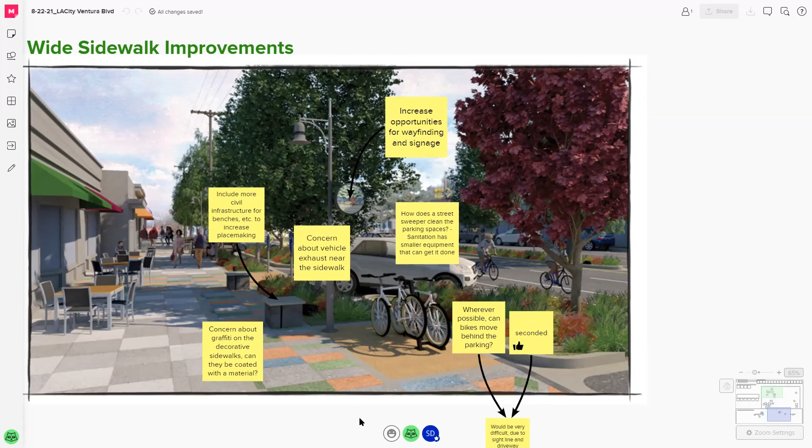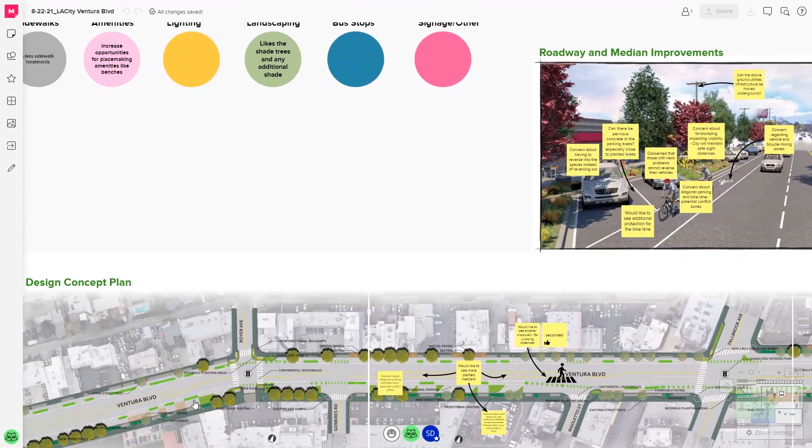Pervious concrete and pervious asphalt both exist, and they're more successful in areas with rainfall throughout the year. Here we have lower, more variable, and less structural loading, which is difficult to control in small batch custom pervious concrete installations. Because we go months without rain, unless it's continuously power washed and swept to remove fine grit from the pore space, after a couple of years it's just as impervious as regular concrete. It's unfortunate, but it's just a climate effect of where we are.

We will ask for it. We're looking for permeable areas in the street where we can fit them in wherever possible, accepting the driveways and other impacts here. I hope that answers your question, Janice.

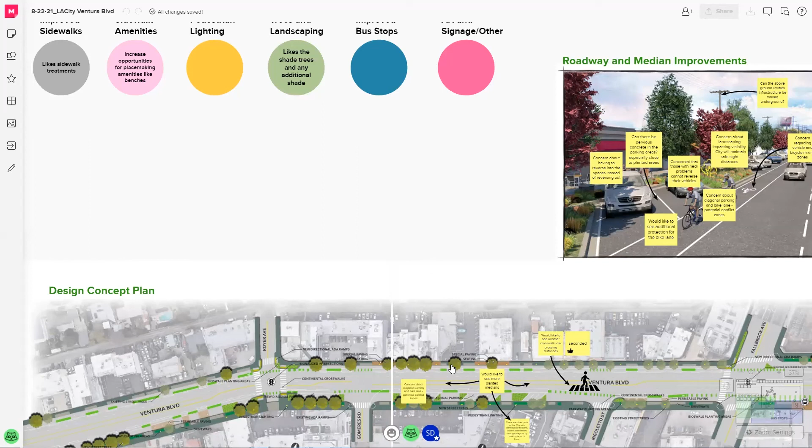Just to add to that, anything pervious is much nicer for improving water quality instead of washing into the pipes, but we usually have to install under drains. That increases both maintenance and initial construction cost if we want them to be successful in terms of perviousness.

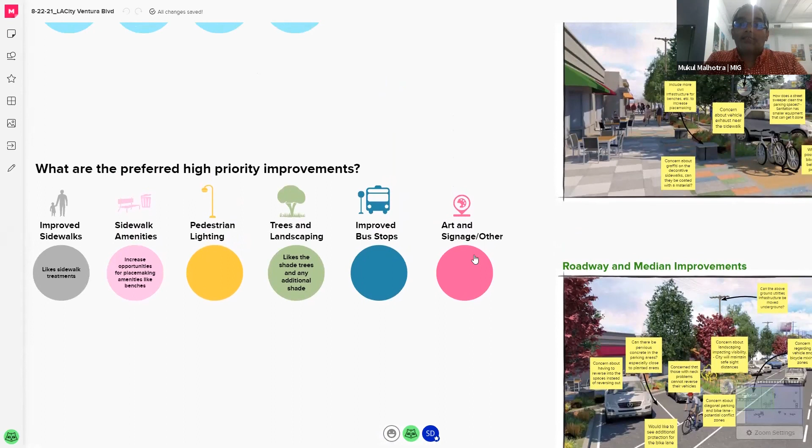I see Heidi, you had a comment about dog walkers, asking if there could be a small grassy area where a dog could relieve themselves, with dog waste bag dispensers provided. Yes, I think so, we can definitely explore that. I don't think the dog will discriminate or wait for a grassy area, but I clearly hear a lot of people, some even talked on Tuesday about dog walking as an amenity or experience they'd like to see as part of Main Street, especially in the evenings and mornings.

You also talked about drinking fountains for both people and dogs. Again, that's a good comment we can definitely explore. Other folks, final thoughts.

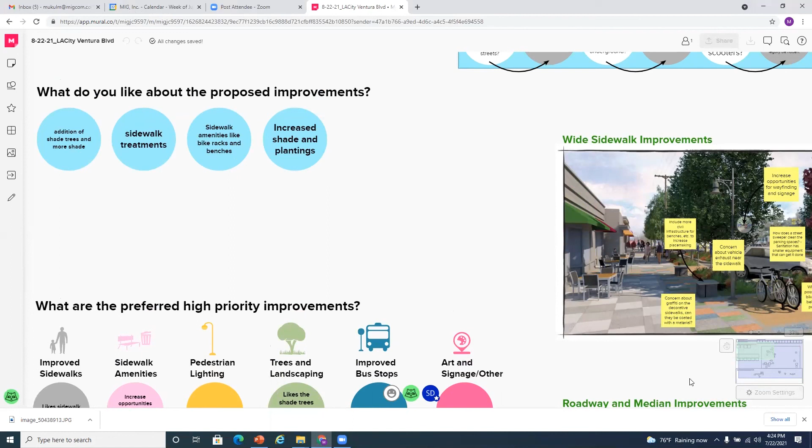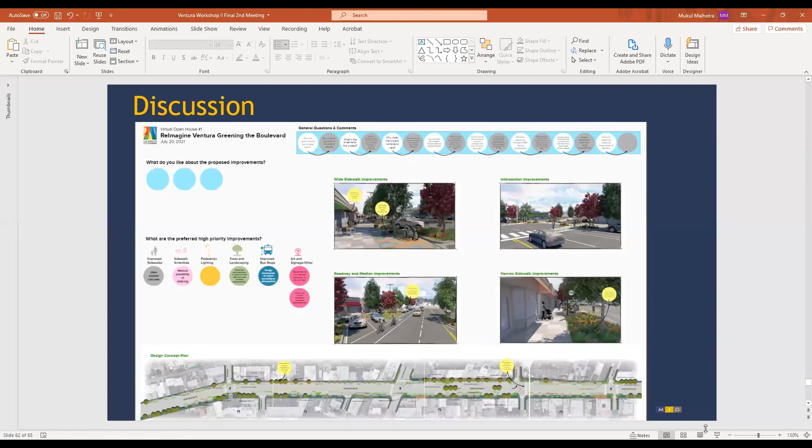Thanks Isul, about, he's had a couple private messages, I hope I'm not outing him, about bike racks that can be art. I think definitely, and Mukul showed some images of that in his presentation.

He was also asking about the possibility of solar panels being mounted above bus stops. I said we'll talk later, because it's a complicated issue about how we manage our transit amenities. I don't know, Michelle, we're getting new types of transit shelters out in the city, rolled out as a demonstration project between two major vendors we're deciding as a city to move forward on. Did you see any provision of solar panels?

On the transit shelters, that's something we're discussing with the two teams that are the top winning bidders so far in the sidewalk transit amenities program, and we'll have to work closely with them. I think it would make sense to have transit shelters here, especially with the investment. Not all existing transit shelters are being replaced with new shelters, that mapping is happening right now to make sure shelters are placed equitably. But we can look into whether there's plans to place one of the newer shelters in this area. Yeah, we don't have any out here now.